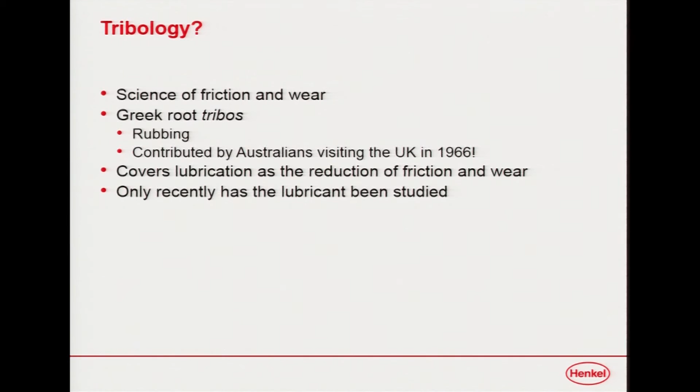Some Australians were visiting the UK. They were visiting a gentleman named Professor Dr. Alistair Cameron at the University of Leeds, and they came up with this idea that we should name friction and wear science, because before that it was just a bunch of chemists and a bunch of mechanical engineers that didn't really talk to each other. So they kind of invented the science right there in 1966.

It covers not only friction and wear, but also lubrication, which is where chemistry most often comes into play as part of it. And it's only in the last maybe 20 or 30 years that people have heavily started to study the chemistry that occurs in the contact. That's where the lubricant scientists come in.

So my background is actually organometallic chemistry. When I did my master's degree, you couldn't even get a PhD in tribology. In fact, you couldn't get a PhD in really anything that had anything to do with tribology, and I'm a little bit older than I look.

So it's just recently we started looking at this stuff, but it's very exciting as an organometallic chemist because a lot of it focuses on how organic ligands bind to metal surfaces and metal oxide surfaces. And without that background, I wouldn't be able to do this.

Back in 1699, which is of course an anagram of 1966, looks familiar, a gentleman named Amontons came up with the idea of friction. He looked at some of Leonardo da Vinci's experiments, and he figured out that - this was Amontons in 1699, and this was actually the case up until about 5 years ago - that friction was basically independent of area.

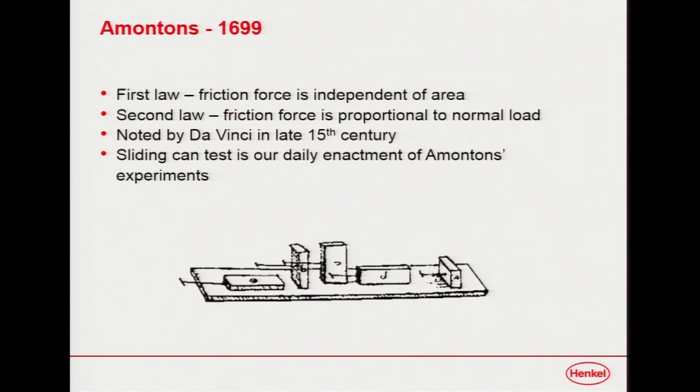Now, friction is the resistive force to pulling. You've got a force, you've got a contact, say a block against a plane. So if you took your keyboard here and put it on a table and you're trying to push it across, the frictive force is the force that resists the movement. And it's dependent on the normal force, the force that's pressing down, typically.

We just learned 5 years ago that Amontons' law is actually wrong. Yeah, so we just learned a whole lot. And when I talk about the chemical mechanical model today, I'm going to talk about some of the reasons that Amontons' law actually is wrong. Part of this research led to proving Amontons was wrong.

So when we do our sliding tests, in the case of the beverage can industry - has anybody ever been to a beverage can plant, or you know what beer cans look like, right?

They make millions and millions of beverage cans per minute in a can plant. Those cans have to move on this big moving web, and they have to move extremely freely, sliding against each other. So one of the things you do when you make beverage can lubricants, since you're trying to lubricate all this machinery, is actually test the resistance of the cans to moving against each other.

This is basically the same type of test that Da Vinci was doing when he pulled his little blocks across the surface, and that Amontons was doing when he decided that friction force was independent of area.

So what happened next? Well, Coulomb happened. You all know Coulomb's law, right? Everybody's heard of Coulomb, we know about the number of electrons in a mole, that sort of thing. Coulomb decided there was a difference between kinetic and static friction. Static friction is the friction of things that don't move, the resistance to the initial motion. Kinetic friction is the friction during motion.

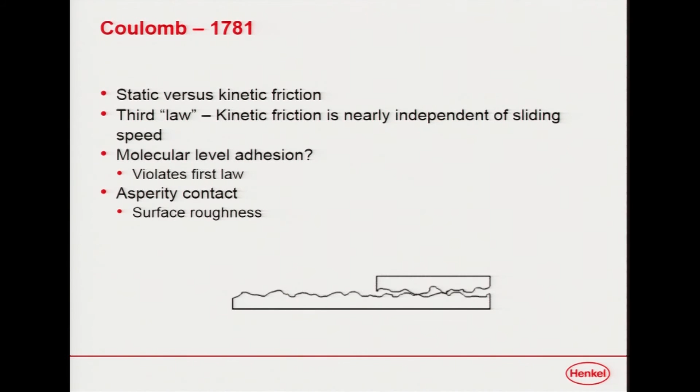So there's two different things we have to care about. In the lubrication world, and on the chemistry side of things, we really care a lot more about kinetic friction than static friction. Static friction is a little bit boring. This is what we call our third law: kinetic friction is nearly independent of sliding speed.

So what happens here? What could be happening between these two things from a chemical perspective? We ask ourselves, is there some sort of molecular adhesion that occurs between these little asperities, these little bumps on the surface? Why is kinetic friction different than static friction was our big question. We got into things like surface roughness back then.

Before we started introducing chemistry in the contact, people strictly considered the behavior of the surfaces - what were the material properties, what was possibly the chemistry of the surfaces. This is why tribology as a rule was largely the domain of mechanical engineering, because it was a surface. Chemists didn't start doing anything with surfaces until we met Langmuir.

Then we got into some more guys who looked even closer at those surfaces. This guy named Dennis Archard said, well, clearly things stick together, and when two surfaces come into contact with each other and there's friction, it's because they stuck together and one's tearing the other one off. Well, that's a little aggressive, isn't it?

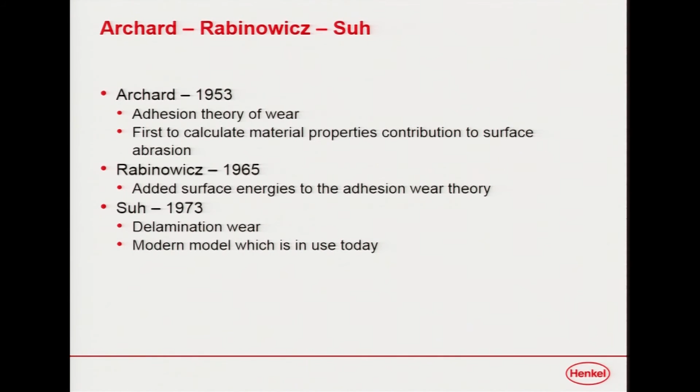Rabinowicz decided to talk about surface free energy. Now, Langmuir of course is our surface free energy guy, and I'm sure you've all seen a copy of Adams and Wilkinson somewhere. Anyway, he added surface free energy to the adhesion wear theory and decided, well, if it's capable of sticking together, the friction will be higher. And if the surface free energy, if that delta gamma is too big, they're not going to stick together.

Nam Suh, who actually is a retired friend of mine from MIT, came up with the idea of delamination wear. He said, well, it's nice if you stick things together and tear them apart, and it's nice if the surface energy works, but what happens when bricks fall? What happens when your rod bearings fail and just big chunks of it come out? Well, maybe the surface energy inside of the material can result in a grain boundary failure, and the material simply separates because it's under too much force.

But we're still not into chemistry yet, are we? We're still in the domain of mechanical engineering. So where does the lubricant come in? These guys were mechanical engineers - love them dearly, especially Dr. Suh - but I mean, mechanical engineering.

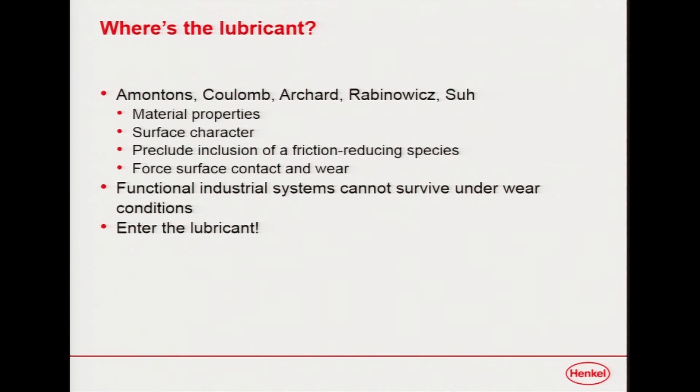They looked at everything, but we know that functional industrial systems never survive under wear conditions. Anytime you have a big industrial process, which is what I do for a living, you need a lubricant. The most common place everybody knows about lubrication is oil in their car engine. We think about lubricating a pan when we fry eggs, and we think about lubricating a lot of things. Even soap on our skin is a type of lubrication. So we bring chemistry into these frictive contacts all the time. Some people are even familiar with your tires hydroplaning on ice - that was a big topic this winter.

So now we start to introduce chemistry, we're up to the 1970s, maybe 1980s, with Nam Suh, where we start thinking about what the lubricant actually does. This is when chemistry starts to enter the picture. I love my science because it's such a young science, and the field is completely wide open for future research, especially on the chemistry side. The mechanical side, not so much. But on the chemistry side, all kinds of cool stuff.

In the beginning, before anybody realized that chemistry was important, a gentleman named Osborne Reynolds started the field of fluid dynamics. If you haven't taken a course in fluid dynamics or explored chemical engineering, this is one of the most novel, most heavily math-dependent areas of engineering. In fact, one of my cousins got his PhD for solving the Reynolds equation around 4 bends by hand, and this was 3 years of math.

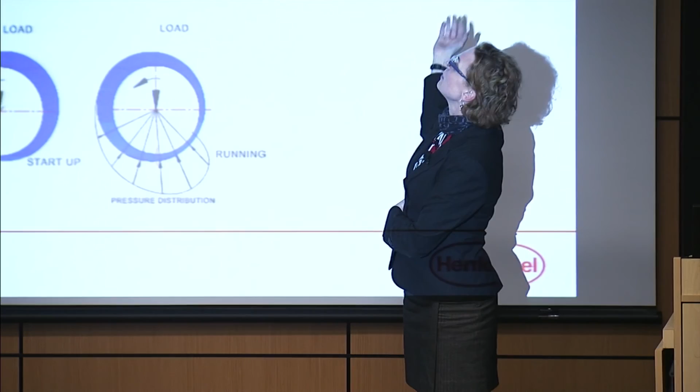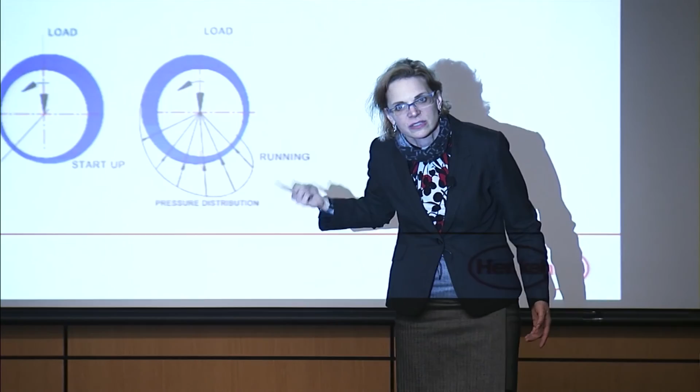So Reynolds looked at the representation of the behavior of fluids in confined spaces. Well, any journal bearing is clearly a confined space. We talk about a journal bearing, we've got 2 outside halves, and then a shaft going around at high speed on the inside, just like a crankshaft in a car, any motor, any type of bearing, they're all the same. So Reynolds came up with an idea that this was a very turbulent situation.

There was a lot of motion in here, and the fluid was not sitting still, and it probably wasn't always flowing perfectly smoothly. But in his case, he said, well, I'm just going to use paraffin oil because that's about as Newtonian as it gets, and it's pretty chemically inert. And I'm going to try to keep this on the mechanical engineering side because I'm a mechanical engineer. Well, it worked up to a point.

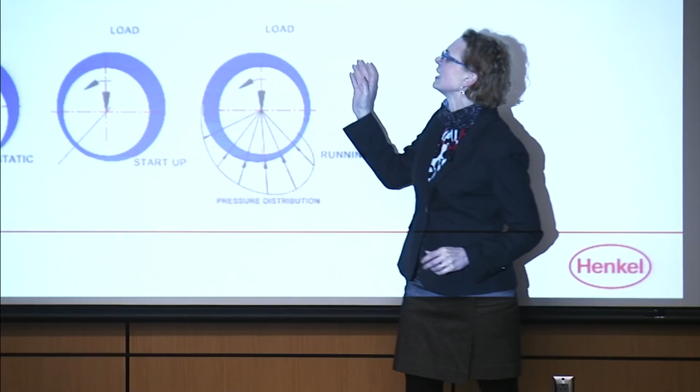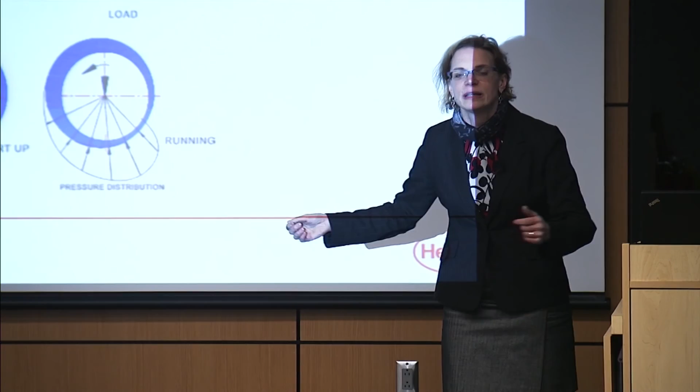What we found was that speed and viscosity govern behavior. We introduced this term of viscosity, the material property of resistance to flow. If you've had some polymer science, you know that as polymer chains entangle, they become stiffer and stiffer, and eventually you get to a solid. Lewis F. Richardson, a famous poet, said: big whirls, big disturbances, have little whirls that feed on their velocity. Little whirls have lesser whirls, and so on to viscosity. I love that, that's a lot of fun.

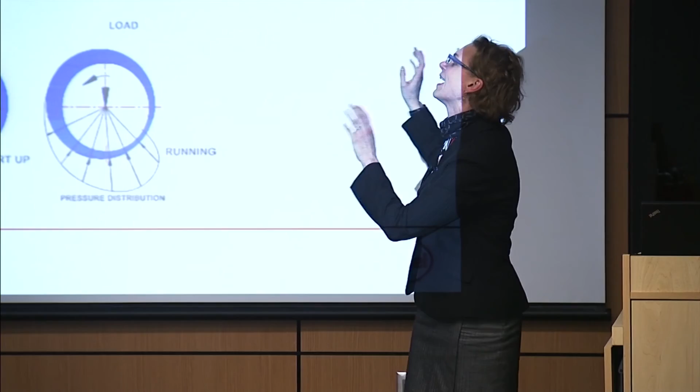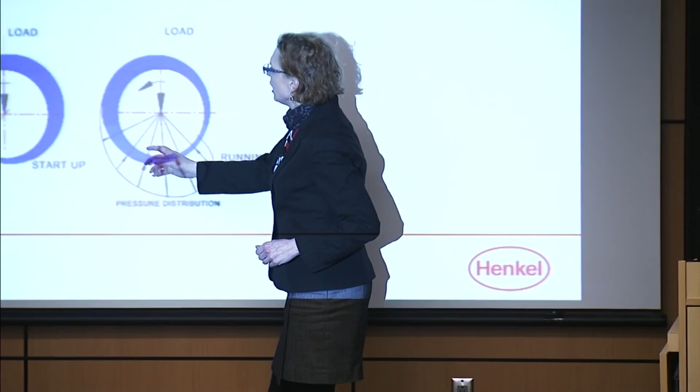But anyway, speed and viscosity govern the film thickness. Now, the film thickness is how much space is separating the journal in the center, the shaft that's rotating, from the bearing wall. Imagine if they were touching, and Archard and Rabinowitz and Suh were active, and they were tearing each other apart. That would not be good, that would be a big industrial failure. There would be wear. So Osborne Reynolds said, well, if this thing moves fast enough, that fluid is going to develop some sort of thickening behavior, and he called it the hydrodynamic wedge.

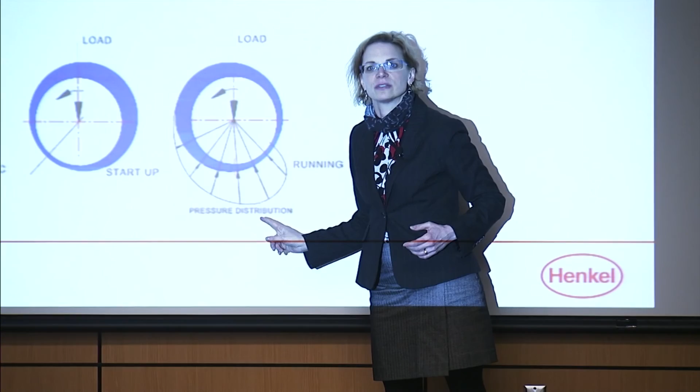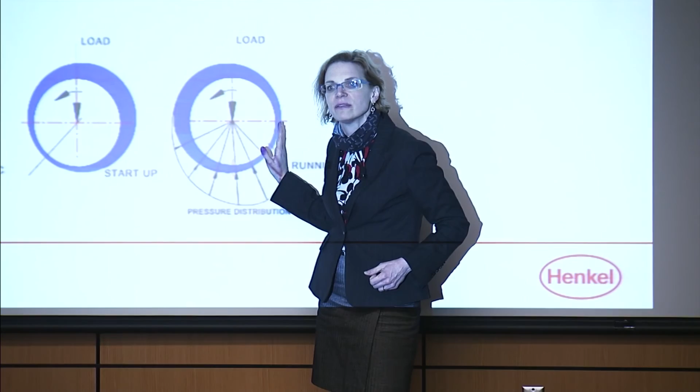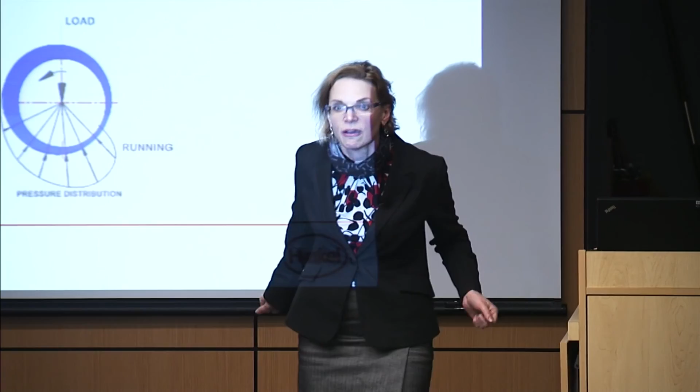This is a representation of the pressure that builds up in the bearing. You can see that as the speed increases, the position of the shaft changes inside of the bearing structure. Why? Well, gravity's trying to pull it down naturally, but that hydrodynamic wedge is pushing back. And how that works is very dependent on the fluid chemistry. If it is a pure Newtonian fluid, and it is not reacting or interacting with itself, if it does not hydrogen bond to itself, if it does not pi bond to itself or anything else, it will behave like a pure Newtonian fluid, and you will get exactly what Reynolds predicted.

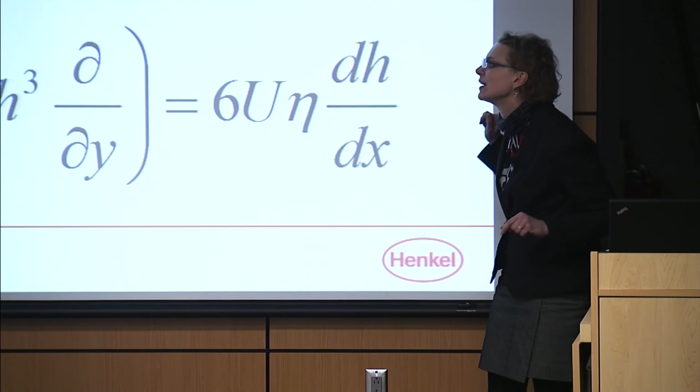Now, that's not always good enough, but we'll start there. So what Reynolds did was create this lovely equation, and I know as a chemist I personally used to freak out whenever I saw a big differential like this, a big ugly one. What I did was say, well, it's a circle, that means we can take one whole dimension out of it, and let's just care about x and y. So when I do this work, I only work in 2 dimensions. If you can't reduce it to 2 dimensions from 3, that's too much stress, honestly.

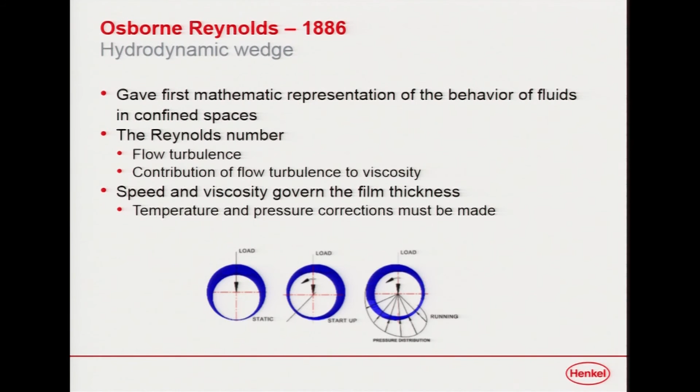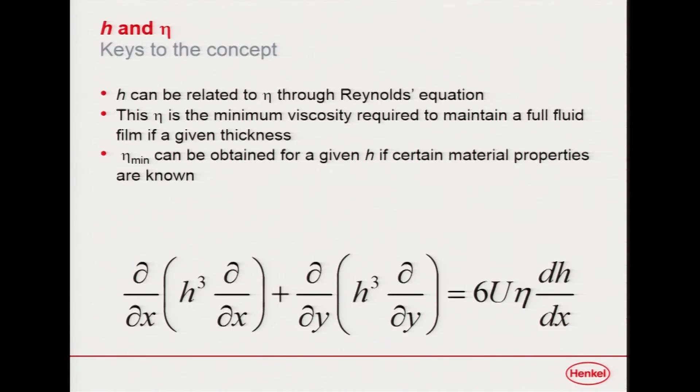So what he did was, going back to the previous point about speed and viscosity playing a big role here, he decided that H, the separation of the bearing from the journal, could be accurately and easily predicted, given a perfectly Newtonian, non-chemically active fluid. And it actually works.

We've had some work in the area of wire drawing, which is a beautiful mechanical representation of tribology, because you can collapse it down to a plane, or to a circle, or even to a slice. It becomes a very neat, mathematically condensed equation.

We've actually shown that in an industrial process, you can predict the minimum viscosity required to keep separation. This is why Honda now has engines with 0 weight engine oil, because that's actually all that's required to run. The beauty of it is viscosity is the resistance to flow—the lower the viscosity, the lower the resistance to flow. That means less energy is lost to friction, and you get more power out of your motor.

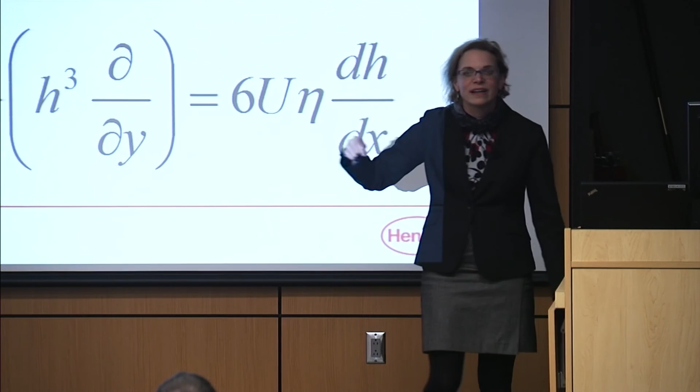Paul mentioned I'm a car freak. I'm a total car freak. And I can apply this every day, all those things I'm interested in with what I do with motors. There's math behind all of it, and it's neat, and it depends on chemistry.

So when we look at this, we're actually looking at Reynolds number here. This is actually the most interesting part of the equation. We have our height, which is our film thickness, and we've got viscosity. But Reynolds number actually predicts how much flow turbulence you're going to experience, and the flow turbulence is where we get pressure.

Reynolds' equation was very interesting, and it became extremely interesting to two guys named Bowden and Tabor. I mentioned Alistair Cameron earlier—he was busy at work proving all of Reynolds' work for these journal bearings and film thickness studies. Well, these two guys, Bowden and Tabor over at Cambridge, decided, yeah, that's good, but we have non-Newtonian fluids.

And we know that fat works as a lubricant. So why does it work? Why does a solid paste work as a lubricant, like butter or lard or coconut fat? Why do these things that are not Newtonian, and collapse in viscosity very rapidly, function so well? If you're familiar with Crisco or butter, when you melt it, the viscosity goes down dramatically with just a little bit of temperature, yet these things function extremely well as lubricants.

And Bowden and Tabor said, no, there's something going on—there's something more to this lubrication than just hydrodynamic wedges. They started to ask what happens as H, the separation of the journal from the bearing in Reynolds' equation, starts to get to 0. And they proposed something they called the boundary condition. The boundary condition is where the magic of chemistry in tribology starts—it's when we say H approaches 0.

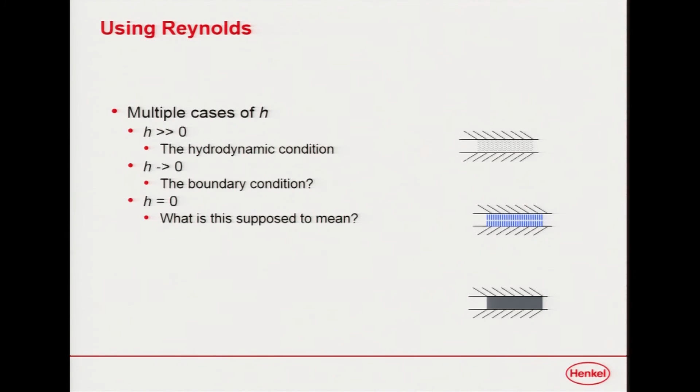In the boundary condition, though, something else happens: they don't orient in the direction of flow, they start to stand up. And now the way the contact interacts with itself, the way the two sides interact, becomes completely different. Because a polymer chain is long and thin, so 4 or 8 of them don't stack up to very much. But take oleic acid and put it up on its end—that's 18 carbons long. That's a lot of space, especially when it's standing up and tightly packed.

It's a self-assembled monolayer on the surface—very tightly packed, a very stiff layer, completely different from a normal Newtonian fluid. Without the attraction of the carboxylic acid to the metal or metal oxide surface, it can't stand up like that. And this is what got Bowden and Tabor jumping up and down.

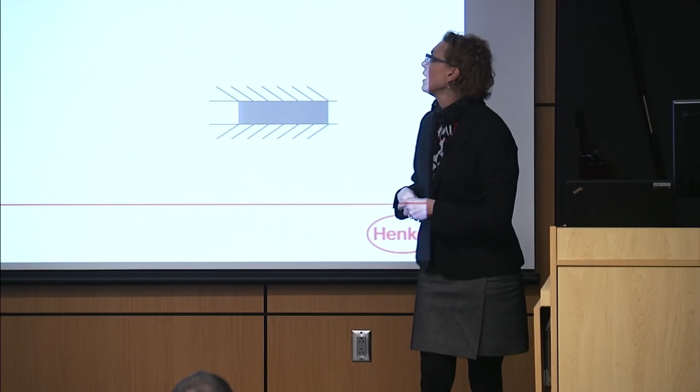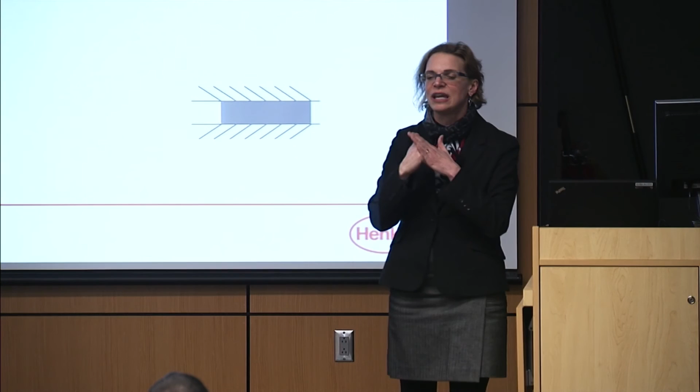But they only got that far. What they weren't able to figure out was what happened when the two surfaces came into contact—was there any chemistry going on there? It was only maybe 15 years ago that people started to think about what happened as the contact closed. Before that, we all just assumed Archard, Rabinowicz, and Suh all applied—those physical, mechanical behaviors, adhesion wear, delamination wear, that's what happened when the two surfaces came into intimate contact. So what if Bowden and Tabor forgot a part of chemistry?

What really is the boundary layer? The word boundary comes from a boundary condition—Reynolds put the boundary condition at 0 to infinity. It's hard to imagine infinity in a lubricated contact; that would imply there's absolutely no normal force, so that wouldn't work. But 0 is extremely important.

In 1922, W.B. Hardy, who did stuff with electronics, said he'd look at this by passing an electrical current through the contact. Since it's usually two metal surfaces being lubricated, if they touch he'd get contact, and if they don't touch, the lubricant film is still there. Hardy was very curious, and he found that sometimes he got contact when he didn't think he should—an electrical signal crossing the gap unexpectedly. Sometimes he didn't, and it all depended on what type of fluid was in the gap.

This was one of the studies that Bowden and Tabor had a lot of questions about, because half his results didn't make sense to them. It got published anyway, but peer review wasn't what it is now.

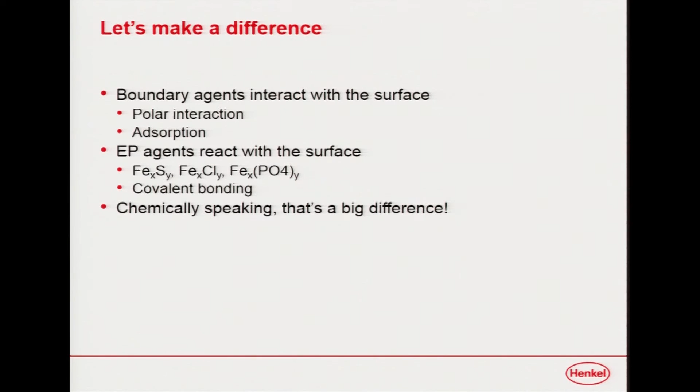So if you're an inorganic chemist, you can start making salts, but you can also make salts that flow. It's a big difference to go from a very basic polar interaction that's very weak. It doesn't take a whole lot to rip those oleic acids or those fatty acids off the metal or metal oxide surface. But you really have trouble to undo iron sulfide. This is a challenge. This is a lot of energy if you want to take that apart.

So what happens to get a covalent bond? Well, you need a lot of heat, and friction, thankfully, generates a lot of heat. I'm sure you've all heard people say, check your brakes and make sure you didn't get them too hot when you're going down a hill.

Don't ride your brakes going down the hill. That's because friction generates a lot of heat, and if you cook your brake linings and you cook your brake rotor, they won't work anymore. Why? Because they've changed chemically. So you no longer have the same frictive interface, and it doesn't work.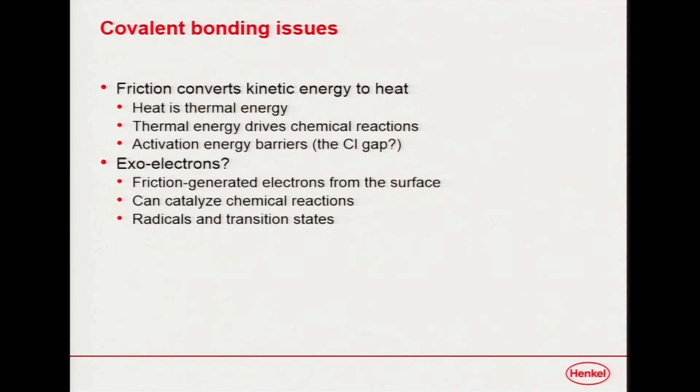Thermal energy drives chemical interactions. We know that. We know that there are activation energy barriers. There was this incredibly challenging question in lubrication science for many years.

We called it the chlorine gap. The chlorine gap was the fact that chlorine worked as an extreme pressure agent at an unbelievable temperature and pressure range. But phosphorus only worked at low temperatures and pressures, and sulfur only worked at really high temperatures and pressures. There was this gap in the middle that you could only fill with chlorine.

Everybody said, why is that? Why doesn't everything just work? Well, it's never that easy. So we started to say, how do we get that kind of energy? We know we can get a lot of heat in, but maybe your system doesn't have a lot of heat, and it still works.

And a research group in Poland caught the idea that perhaps when you start to really hit those asperities, just about the time we discovered that you could get physical emission of electrons, they said, well, is that possible in a frictive contact?

And when you consider that on a metal surface, a metal oxide surface, you have nanometer level asperities in some cases. When those are hitting, those are very high pressure contacts. And it was very quickly realized that, oh yes, you can throw a lot of electrons from those surfaces.

And how do you get a transition state? You add electrons, typically to organic molecules, and you get some sort of transition state where you've got extra electrons, or you've opened up a bond somewhere halfway, and it's very reactive. So we've now figured out that there is some mechanical way to drive chemical reactions on these surfaces. And everybody kind of knew this was going on, but nobody knew how to talk about it even.

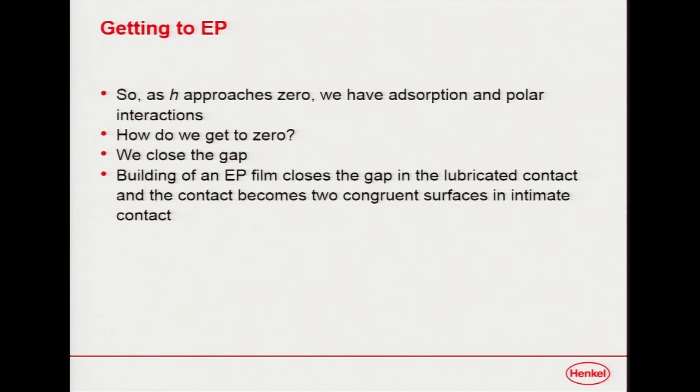How do we get there? Well, we close the gap because we've gotten there. When we build an EP film, when we start to run these reactions, we actually do close that gap. H does come to zero because now you're riding on absolute fully mated films. The surfaces, the actual base metal surface, may still have a shape to it, but it has formed a flowing film in between, and they are now actually completely in intimate contact because of this physical flowing layer between them.

It's not a traditional lubricant layer like a Newtonian fluid. It's actually a reacted layer on the surface, which is really cool. So we start to go back to Reynolds, and we say when H is large, bulk properties take over. So all you have to know is material properties. Those are your basic paraffins.

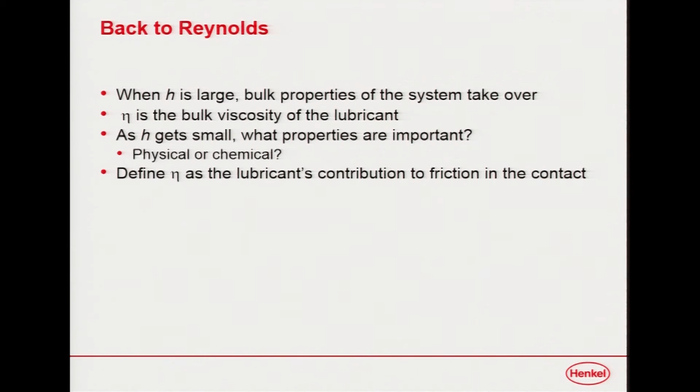When eta is the bulk viscosity of the lubricant, and when H gets small, we ask what properties are important, are they physical or chemical? Well, a lot of it's both. And what I did was I defined eta.

Instead of saying it's just viscosity, I said it's the frictional contribution of the lubricant to the contact. I didn't know if it's just viscosity, I knew it's resistance to flow. So I took the old definition of viscosity, the resistance to flow, and used that instead of traditional Newtonian viscosity. And we were able to get somewhere.

So what do we look at with eta? When we look at eta for extreme pressure, it's easy. It's basically the bearing surface is an EP film, so it's the shear strength of that metal salt we've generated on the surface. It's relatively easy. We did chemistry. It still has mechanical properties and material properties. We just have to apply them.

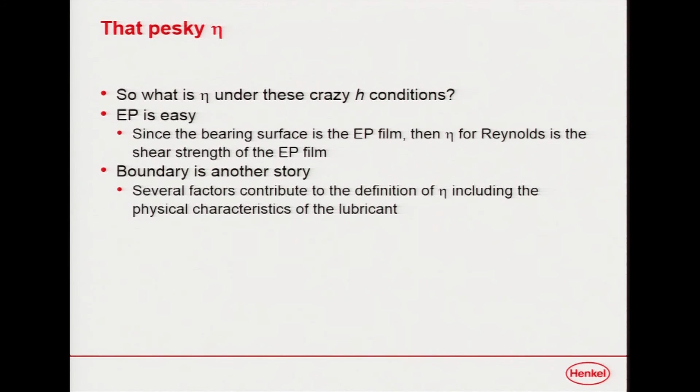But boundary is another story, and this is the area where the most research is being done. It's the most exciting area because, honestly, none of us really know what's going on yet. We know that for H equals infinity, that's hydrodynamic lubrication, we don't allow any interaction. I keep talking about these Newtonian fluids and isoparaffins that just don't do anything. And we know that friction force strictly comes from internal frictive flow.

We know in the boundary only polar and adsorption reactions occur, and we define it as the boundary character of a lubricant based on its ability to adsorb. So if it can't adsorb, it doesn't have any boundary capacity.

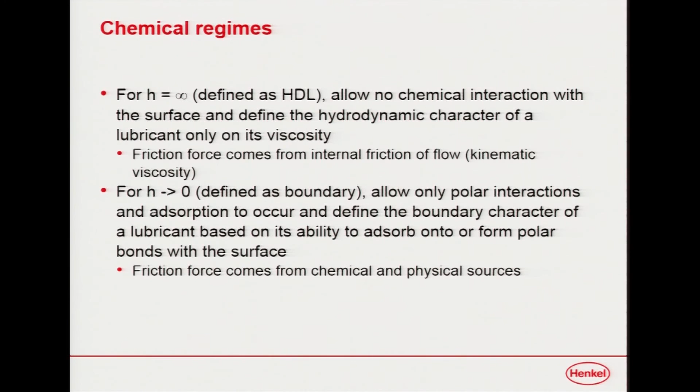And you know what's funny is that in this lubrication business, back in the 50s, you would call up some guy called a lubrication engineer and ask him to fix your problem. And the guy would kind of wave his magic wand and hope. We're just now, in the early 2000s coming into the 2010s, starting to understand how this works. So if you were ever interested in industrial chemistry, here you go, this is the field.

So we stop at H equals 0, and we start to look at these EP properties. Well, frictive force comes from the yield strength of a new compound. And we joke up here about, ooh, that was deep.

Well, in 2003, when we first presented this, I got chased out of the room by 100 chemists and tribologists and mechanical engineers who said, that can't be. Today it is. Today we know this is actually true.

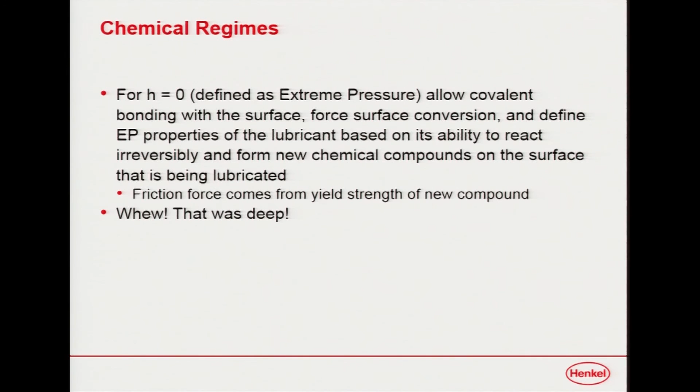So it was really exciting to do some foundation work, but it's also difficult because I know now what I don't know. And what I don't know is really, I know the boundary layers stand up and I know they do a lot of things, but I don't really know how they work.

So why bother? It's very simple. We have good mechanical engineers to support us as chemists, and they know exactly what their contacts look like. But it becomes a job of a lubricant formulator to figure out how to get the right chemistry into those contacts for the right operating conditions.

And we take things away from art and move them into science, because art does not, in fact, actually pay particularly well. Science pays.

So what I want to do is go quickly through a real-world example. And the real-world example is going to be steel rolling.

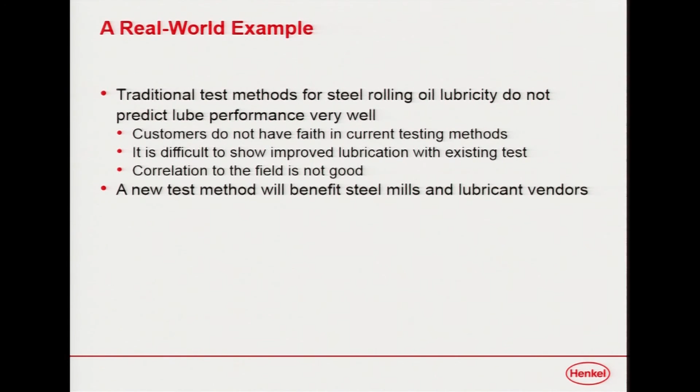Everything around us, we find steel. It's typically sheet steel that's been formed into a shape. The pans for the chairs here may or may not be steel, they may be plastic. The legs of the table are assuredly steel. Your unit body of your car or your box frame of your truck is most assuredly steel.

To get steel, we start with iron ore. We cook it down in a Bessemer furnace. We make raw steel out of it. Those ingots have to be remelted and poured out and cast. It's then rolled down. The problem is, again, oh, it's lubricants.

It's a black art, and no one knew how to predict which lubricants were going to work or not in a mill. Now imagine a steel rolling mill. You can imagine how big your car is and how big a piece of steel you need to make the side of a car. Well, this is what a rolling mill looks like. It's that blue thing in the back.

That's as big as a football field when it's a 6-stand mill. The strip going through it is upwards of 12 feet wide. It is a lot of steel. It starts out this thick and is squished down to millimeters, submillimeters, through many, many processes.

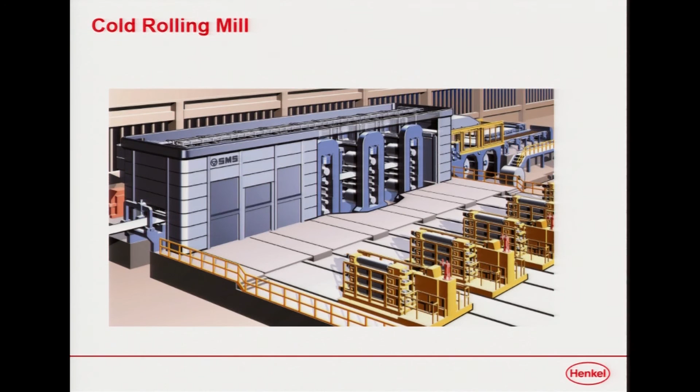Now imagine if your job is to figure out how to keep that mill moving and not have big wads of steel pile up in between the rolls. Well, you better be a pretty good tribologist, huh? You better be a pretty good friction and wear engineer.

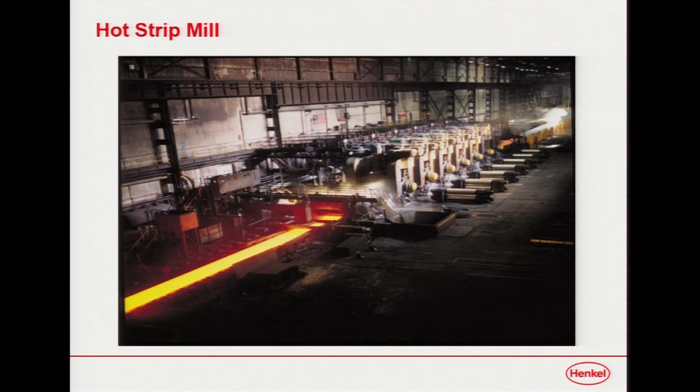This is what it looks like when you have a hot strip mill. In this case, it's a little bit narrower strip, but you can see it just keeps going. The steel is yellow, so it's about 2,000, I think around 2,000 F. It's very, very hot. It's a very challenging chemical condition, you can imagine.

Remember we said we needed heat to drive chemical reactions? Well, there's your heat. We don't need a whole lot of friction here. In fact, in the rolling contact, we don't really want a whole lot of friction at all.

We have something we call the neutral point, which is where the strip is moving at the same speed as the working roll. The working roll is the thing that's applying the pressure and squishing the steel down. We have what we call the backward slip zone, where the steel is moving slower than the roll, and the forward slip zone, where the steel is moving faster than the roll.

Try to come up with a more challenging contact mechanically. I dare you. This is about as bad as it gets. This is a bit of a challenge, and it's a couple thousand degrees, just so you don't forget.

Lubricant is flooded onto the strip. We're trying to keep the rolls from getting too hot, because if the rolls get too hot, they're going to bend, and then the steel will get out of tolerance, and it'll get bowed and buckled and wavy and messy. It's actually really kind of interesting to watch a steel mill fail, because literally the steel just balls up in between the rolls and starts spitting out everywhere.

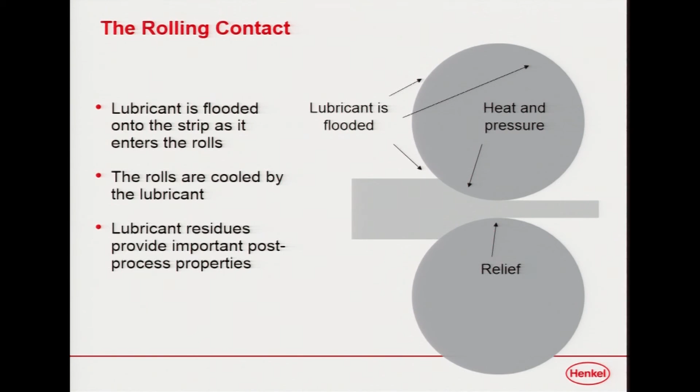It spits out the top, and the first time you see it, it's very frightening. It's very loud when it fails. You don't want to be there. After that, when you sense that it might be going bad, you can see all the operators in the mill start running away, because no one wants to be there for that.

So we apply a lubricant to keep it cool. We're trying to keep the work roll separated from the steel. We don't want them to touch, because then Archard would apply and we'd start sticking, and then really things would go bad. You can even get it where it wraps around the work roll. Yeah, you pretty much just recycle the work roll after that. It's just gone.

So the lubricant does all of that, and it does something else which is kind of interesting. It provides post-process properties. You've got so much heat in there and so much energy that you can actually treat the steel surface just by rolling it. So you can produce a completely different chemical surface on the steel just by going through this operation. It is really cool. So we call this a slide-roll-slide contact.

It's very similar to tires on the road. It's very high speed. It's extremely high load, because let's face it, you don't squish steel with your fingers. And the reduction, so the percentage reduction, this is how much reduction we take in the strip. This is what governs how much we can squish it, because it can only go so fast out of the back end and only so fast out of the front end.

If you squish it too much, eventually it actually starts to back up, and you get these little kind of bumps in the steel as it goes, and the thickness varies very dramatically over the surface.

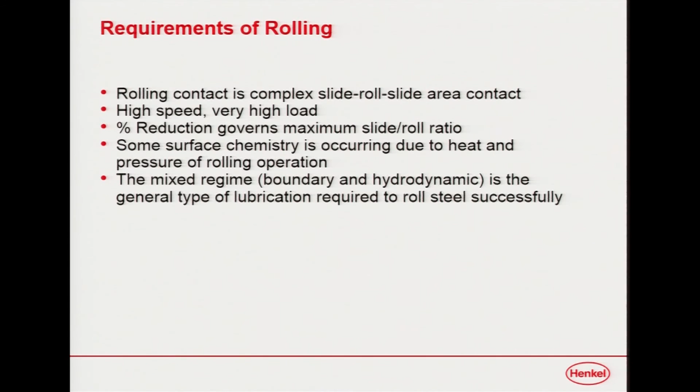So we know there's a lot of surface chemistry, and we know that there's enough heat in there that there's probably something going on. We also know it's moving fast enough that no matter how much surface chemistry you have, it's moving so fast it's a Newtonian fluid anyway. You get to a speed point where you build up hydrodynamic wedges. I mean, you actually have to.

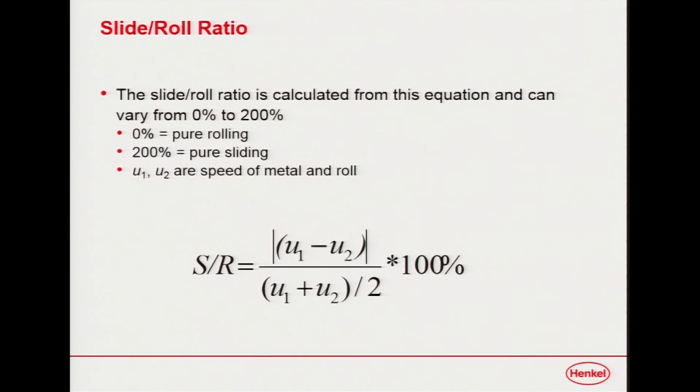So then we look at the slide roll ratio. This is a little bit of math, which is a way of defining how far out on the work roll we can go. Like how many degrees of the work roll can we go before the steel will actually back out of the roll? It's just important to know that that exists.

So what we did was we had a customer who said, we have this little toy mill, and we're going to test a bunch of lubes, because they tried running a bunch of tests, and none of them really correlated. So they sent us this data and said, here's some oils we ran, and here's what we were able to achieve for roll speed and roll force.

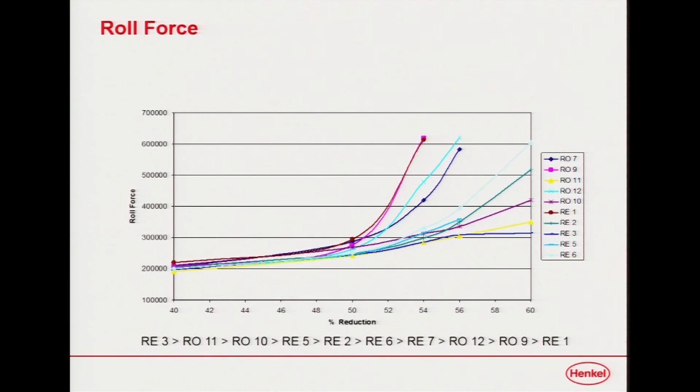Now, the roll force is very important, because that's the amount of pressure you're putting down, and eventually you can overcome the mechanical strength of the mill. So you really don't want to go there, because then your mill stands break, and that's expensive. Your work rolls fracture. Those are really expensive.

So you want to be able to get out to these very, very high reduction ratios. 50% is basically we've reduced the strip thickness in half in one pass, through one pair of rolls. We want to be able to do that at very high speeds and very low roll force. This roll force is very critical. That's what we're shooting for - that big reduction and that low roll force.

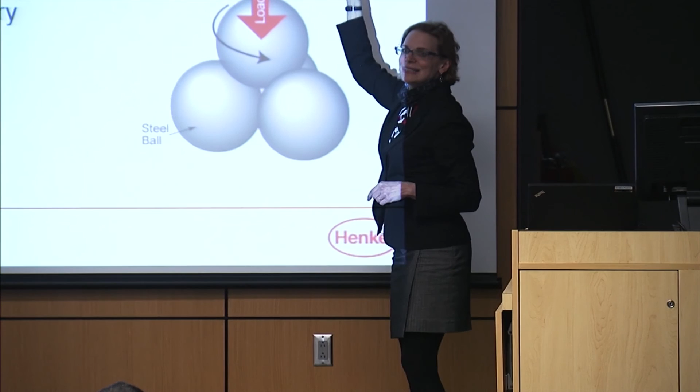Well, you can imagine that if we go back a little bit, we probably produce an area contact here, right? Amontons and the pulling with the blocks in the area. The tests they were trying to use did things like, we took a line contact, because it's a block, so it's a square rectangle thing on a ring, so that makes a line contact. We're going to test friction there. Do you think that has any relation to a steel rolling mill?

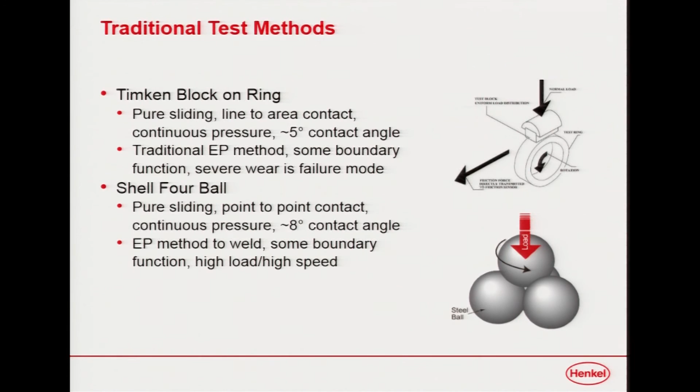No. Then we took 4 balls and stacked them up and spun the top one. We got 4 point contacts. No relation to a steel rolling mill. We don't have any sliding - well, we have sliding, but we don't have any slip. We don't have that forward and backward flow motion going on in these contacts. They looked at something called a pin and Vee tester, did the same thing, and then they came up with this thing from Japan, and nobody really knows what it does, but it doesn't work either.

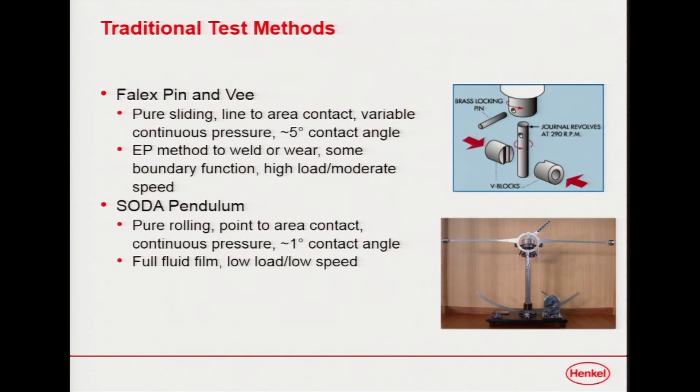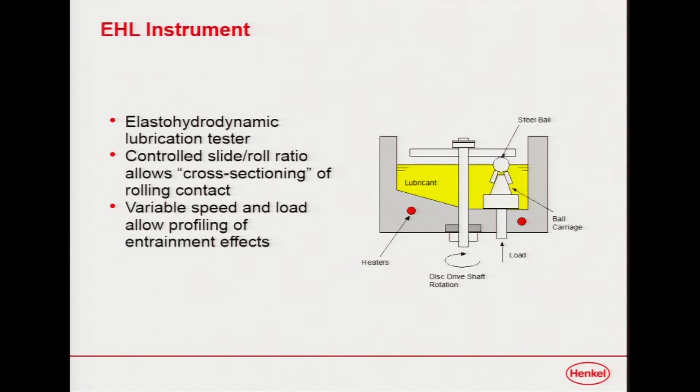So we found a device that was developed by our friend from England, Dr. Cameron, called the elastohydrodynamic lubrication tester. And it's a point contact, which is not like our steel rolling mill. But what's very interesting about it is you can vary the speed of the steel ball and vary the speed of the flat plate that it's rotating against.

And by doing that, we can introduce sliding into the contact. So we can't really create a rolling mill because that would be very expensive in the laboratory, but we can actually control the amount of slide and rolling that's occurring in the contact with this thing.

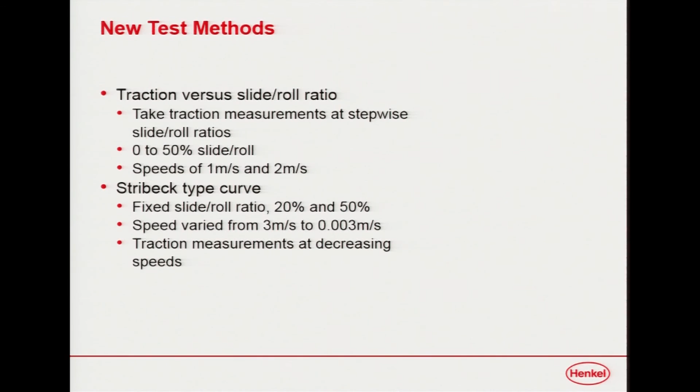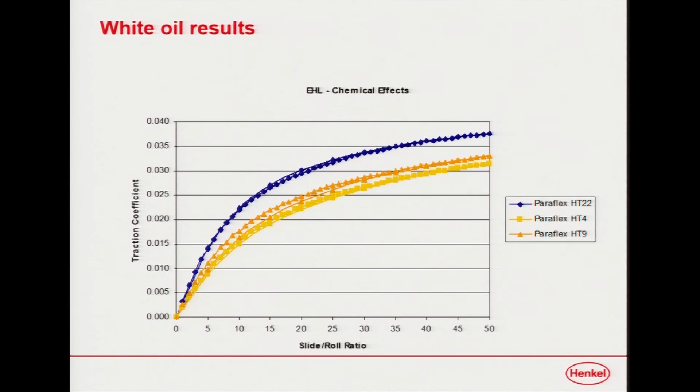What we did was we looked at something called traction versus slide roll ratio and a Stribeck curve - fancy tribology terms you don't need to know much about. But you do need to know that when we put a Newtonian fluid in there, it produces these beautiful stacked up curves. It says, oh, hydrodynamic lubrication - perfect, pure hydrodynamic lubrication. And as the viscosity goes up, the traction or friction coefficient goes up, because what is viscosity? It is the resistance to fluid flow. That is the frictional contribution of the material in the contact.

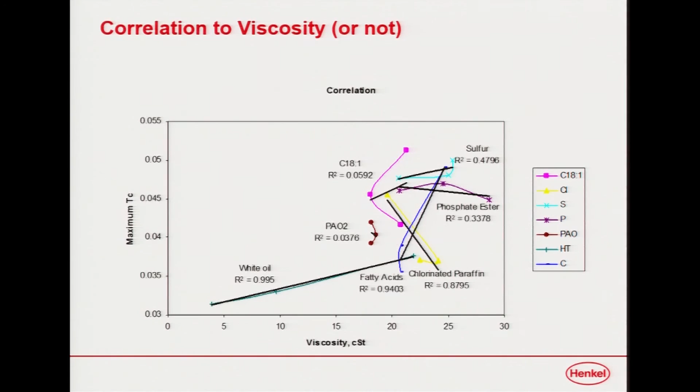It works. But when you start to get into things that are not white oil, which has an R squared of 0.995, and you start to put in things with boundary activity - fatty acids work pretty good, chlorinated paraffins worked okay, but phosphate ester? No. Oleic acid? No. Sulfur materials? Not really. So something is active chemically with these materials that causes you to deviate from normal viscous behavior.

And we kind of knew that, but we couldn't really tell until we started matching chemistry to mechanical conditions. You had to have both. In this field of science, you have to have both. So if anybody ever makes fun of a mechanical engineering degree, remember, it's not a bad thing.

What's interesting was when we started to look at the phosphate esters in the oil, those had a very poor correlation coefficient, of course. When we put them in a pure white oil, there was not a whole lot of deviation, and they behaved very hydrodynamically. But when we put them in water, this is called hysteresis.

Hysteresis means going in one direction is very different than going in the other direction. And if you look at the amount, the traction coefficient, it goes up. What happens when it goes up? There's more friction. And when there is more friction, there is more heat. And when you get above a certain point, it starts to come back down. Why? Because you have gone over the activation energy barrier.

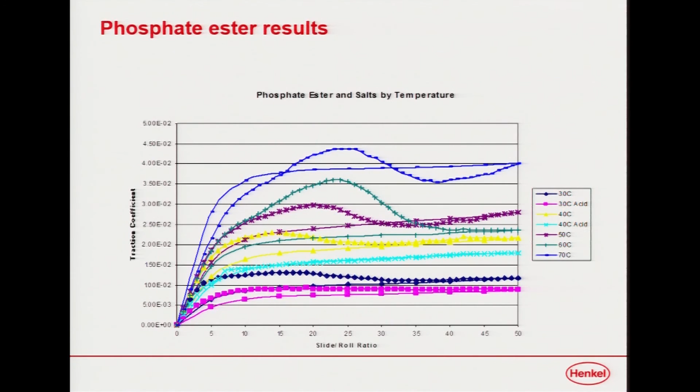Wow. If you ever questioned activation energy, right there. We saw all kinds of wacky stuff. When we started introducing changing temperature, we could get the curves to do all sorts of things. We started to actually pull together the idea, even when you ran forwards and then backwards versus backwards and then forwards, we could do different things.

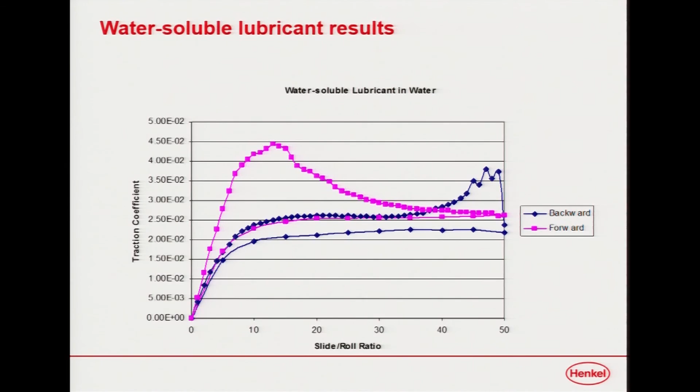We were able to start actually creating a model for how boundary materials, these materials that simply behave by very weak polar or electronic adsorptions, start to act on the surface of a purely mechanical contact. We were able to start developing what we call the chemical-mechanical model for lubrication. We ran all kinds of this stuff. It was a lot of fun.

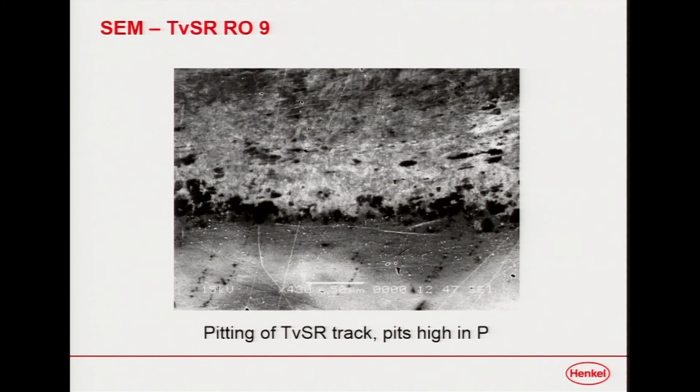When you throw that surface into the SEM, you get holes in it. And those holes were extremely high in phosphorus, in inorganic phosphorus, no less. Even in the most lightest weight boundary lubrication condition, we had succeeded in pulling the phosphorus off the phosphate ester. We decomposed the phosphate ester in the frictive contact. And that is why a lot of phosphorus in your engine oil is bad for your catalytic converter, because it will come off.

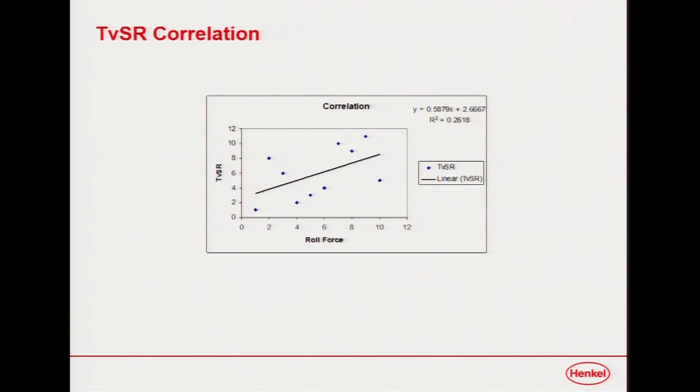So we did some other stuff. And what we found in the end was we went back to our rolling oils, and we did those same kind of tests on the rolling oils. And when we first did the correlation, it didn't look too good. So we split it out, and we said, well, what if the base oils are part of it? So the things that have paraffinic base oils, which are less chemically active base oils, versus those that were esters, which are relatively chemically active — all of a sudden those correlations improved dramatically.

Now, from all this work, what we were able to do was study a very large rolling mill in an industrial application and make a predictive judgment about what lubricant would work best. And we nailed our target reduction, we nailed our target roll force, and our target speed on the first try. And that was the first time that had ever been done in a steel rolling mill.

So it sounds like, oh, she's just talking about all this stuff. But the truth is, predictive testing and understanding how chemistry works in a mechanical contact is a huge key part of making everything work today. So it's a backwards science. People say, oh, lubrication stuff, nobody cares, it's not important. It's very, very important, because when we do it right the first time, no one notices. And that's a darn good thing.

We kept going, we didn't find very much. But what we did find was that our traction versus slide roll, this one specific test we were playing with, really tracks well within groups of base oil. So as long as we minded our chemistry very, very closely, we could do extremely well with predicting the behavior in the mill.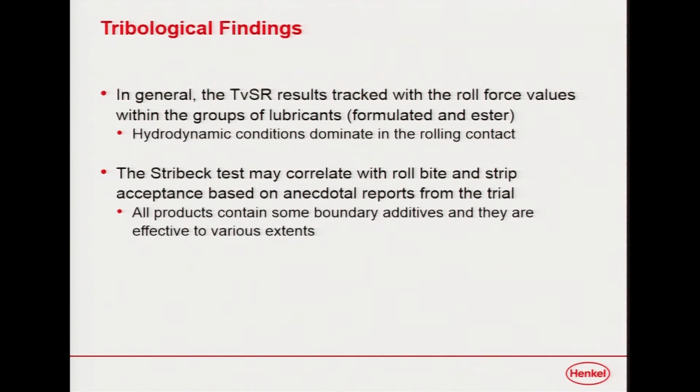We found this other test, well, it might tell us if the steel was actually going to go in. What's really dangerous and what's really bad is when you try to put the steel in the mill and you have a rejection. Because you've got your hot continuous caster pouring steel down that line, and you really want it to feed in. Otherwise, you have lots of 8-inch thick folded up hot steel coming at you at a couple, I don't know, probably about 20 feet a minute. That's not pretty. On the chemical side, we found that all these materials had sulfur in them.

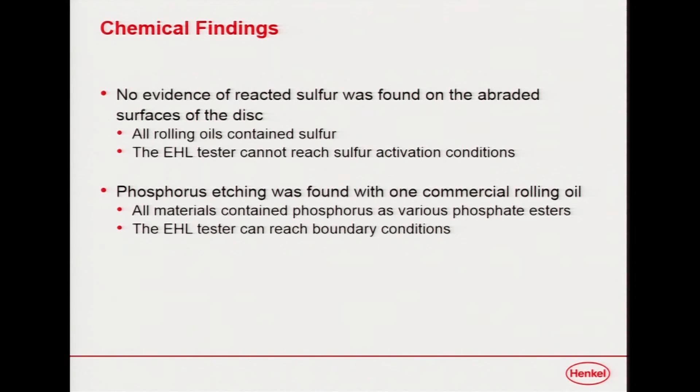We never reacted the sulfur, but boy, we sure did react phosphorus. So we actually showed, yes, the chlorine gap is real. We were able to corroborate all of the results we have from all the other testers where we specifically test sulfur, phosphorus, and chlorine. So we found that this chlorine gap thing is truly real. We didn't actually test any chlorine in here because we didn't want to damage the tester. We were very concerned about damaging the actual tester, so we didn't put any chlorinated materials in it.

But we also found that this particular tester is unique because it does this Reynolds type stuff with viscosity and Newtonian fluids and hydrodynamics, but it also can reach the boundary conditions that we have so much trouble studying and understanding. We found a whole lot of anomalies.

We found that we could actually define - if you gave me a curve, or gave one of our tribologists at Henkel a curve, they could actually say, yeah, that has this particular material in it and it was run in this manner. It was so incredibly predictable.

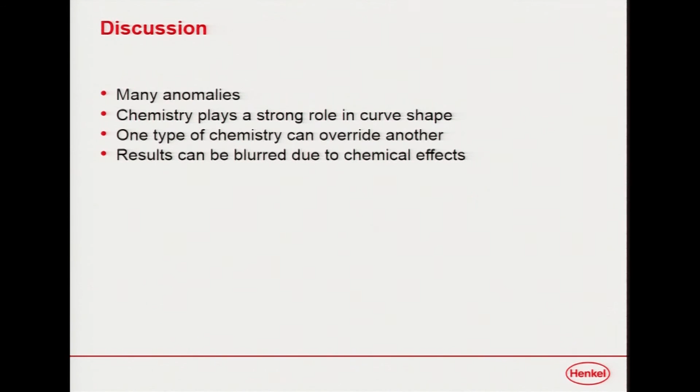And we found that not only does certain types of chemistry have these predictive curves, but they can override other types of chemistry. So we can get very specific about which regime we're active in. And sometimes you can get a little bit of blurring, so when we looked at those correlations, we could see that sometimes things didn't line up that well.

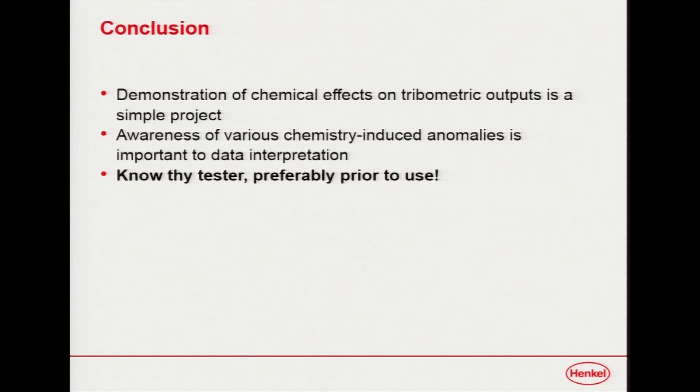But the chemical effects in tribometric outputs turned out to be a relatively simple project, but it was very dependent on having the right equipment. Understanding how chemistry played a role in these contacts was extremely critical to interpreting the data. So without an understanding of chemistry, no one in the tribology community would have been able to interpret this. We absolutely needed chemistry to figure out how to make this work.

So we say, know thy tester, preferably prior to use. So thank you very much. I'm happy to entertain any questions.

Corrosive properties of the lubricant must have a pretty important role - do you take that into consideration? Absolutely. So the question was regarding passenger car motor oil and corrosion properties. Corrosion properties are very, very critical.

We typically say we start corroding when we enter the boundary regime, because without some sort of interaction with the surface, you're not going to transition into that next regime. And of course, without serious changing of the surface, you're not going to enter the EP regime.

The trick is managing it. So we want to balance oxidation or changing of the surface with the mechanical properties of the surface, and we also want to make sure that any oxidation or changes we do to the surface are positive for the lubrication condition. Anti-wear additives are very typical of this - this would be your zinc dialkyl dithiophosphate.

And the idea behind them is to literally corrode the surface in a controlled way. You're oxidizing your phosphate, you're phosphatizing the surface, creating a zinc deposit. But you want it to be controlled, and you want to make sure that it's more wear resistant than the base metal that you're coating.

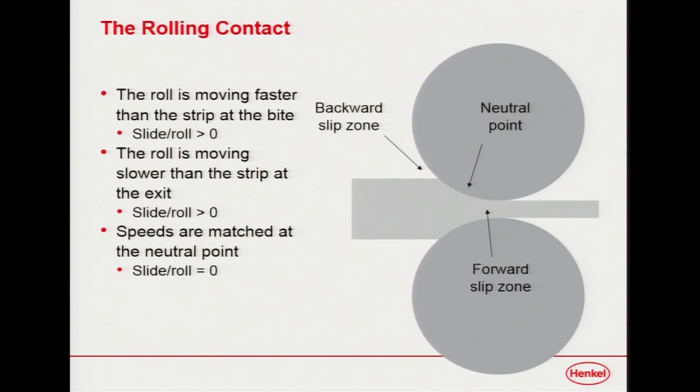What you would typically see is you'll have a lot of evolution of gas on this side, but by the time you're a couple of degrees into the contact, you're well past the compression point of steam. So you will have, again, a full liquid in the interface all the way out to a few degrees before you exit the contact, and then again you will start to form a gaseous layer.

And the advantage of that is it actually blows the strip off the work roll. So we are looking, especially in cases where we're using a water-based lubricant, in these type of situations - we are absolutely looking for that, and it's typically steam. We don't want the other molecules to gas. We want just steam gassing here.

You mentioned a zero W instead of 5W oil. Is that useful for automobiles or things like that, or what would it be used for?

Well, right now, as part of both the U.S. and the EU's mandates for higher fuel efficiency, one of the biggest gains you can have in a modern internal combustion engine is reduction of internal friction, engine component friction reduction. Going back to our Newtonian model, any friction in the contact is going to consume power. So as we reduce viscosity, we reduce the internal friction in the contact.

And you start to see engines that are designed to run at those tolerances and designed to run with those types of oils. So a ratty old BMW Boxer motorcycle won't run anything less than 20 weight because the gap between the rod and the main bearing is a mile wide, whereas in a relatively modern gasoline motor, you'll see very, very small gaps in the particular journal and shaft combinations, and those are designed to run on these very low viscosity motor oils.